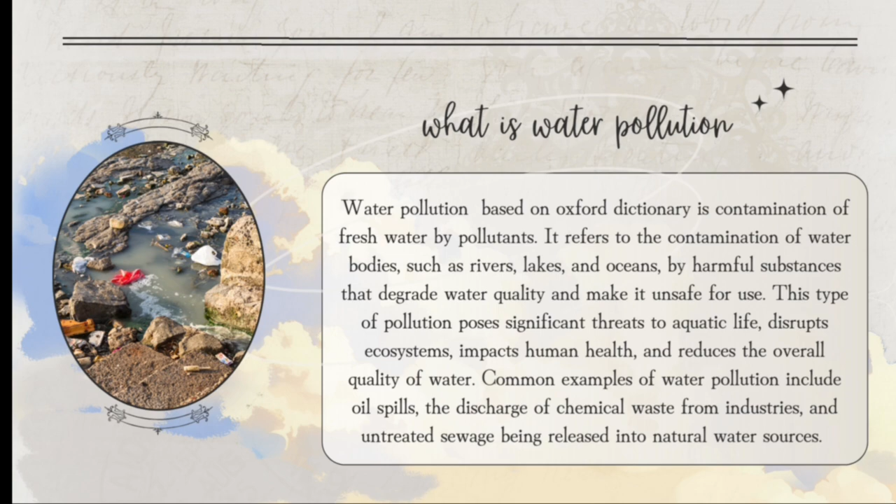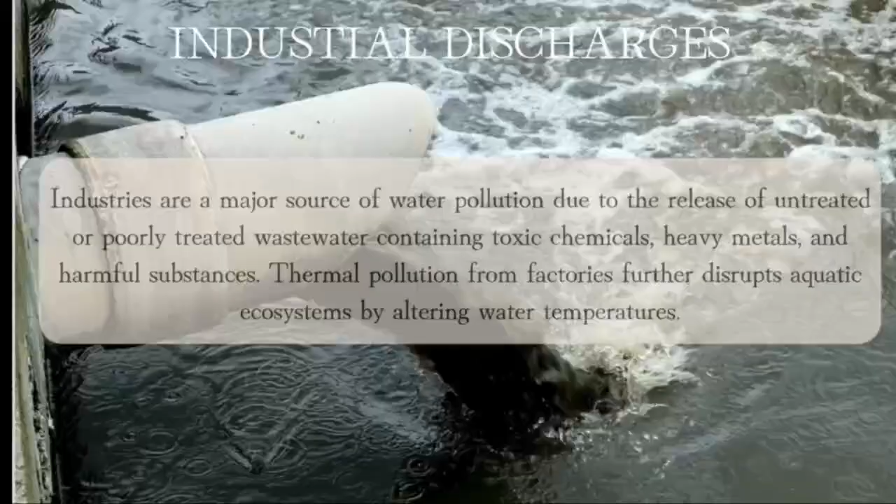Here are some of the factors that contribute to water pollution. Firstly, industrial discharges. Industries are a major source of water pollution due to the release of untreated or poorly treated wastewater containing toxic chemicals, heavy metals, and harmful substances. Thermal pollution from factories further disrupts aquatic ecosystems by altering water temperatures.

Secondly, agricultural runoff. Excessive use of fertilizers and pesticides in agriculture leads to runoff during rainfall, carrying these chemicals into water bodies. This runoff causes eutrophication, where algal blooms deplete oxygen levels, suffocating aquatic organisms.

And last but not least is urban runoff. Urban runoff, like oil spills, introduces harmful hydrocarbons and toxic compounds into the water, poisoning fish, marine mammals, and other aquatic organisms. And to make it worse, the long-lasting nature of its harmful effects persist for years.

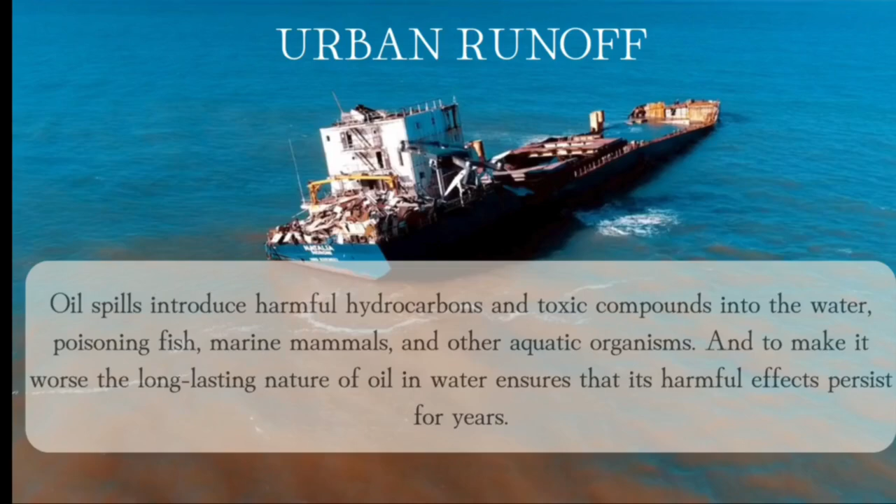Now let's move on to the experiment. The experiment that we're conducting is about evaluating the severity of oil spill. The objective is to assess the impact of an oil spill on water quality and aquatic ecosystems.

These are our expected outcomes. During the pre-spill stage, baseline water quality will show normal DO, pH, and low turbidity. In the post-spill stage, DO levels decrease as oil limits oxygen exchange with the atmosphere, turbidity increases, and pH may remain stable depending on the oil type.

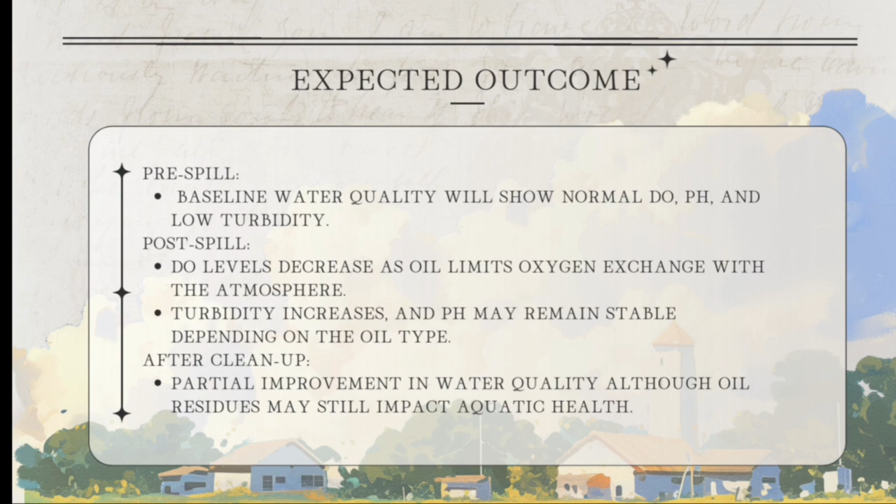Lastly, after cleanup, we'll see partial improvement in water quality, but oil residue might still impact aquatic health. By doing this experiment, we conclude that this demonstrates how oil spills harm marine life by disrupting their habitat, affecting their health, and leading to long-term ecological damage.

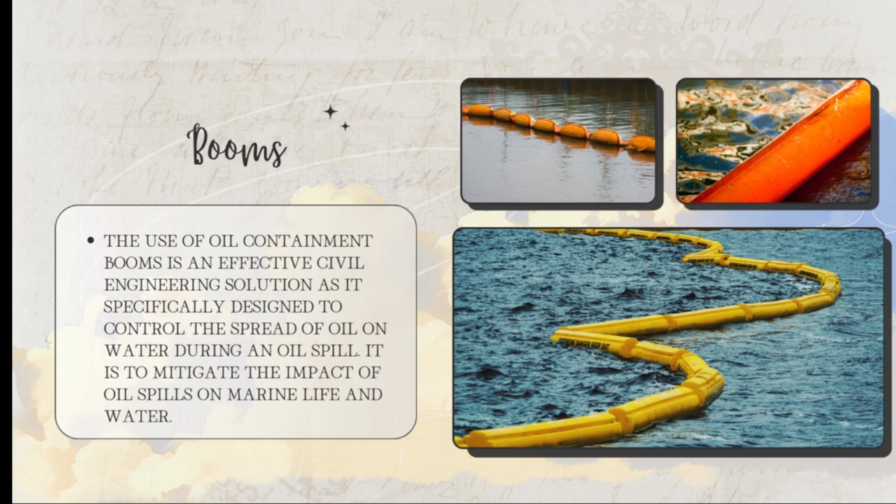Now, here comes a civil engineering solution for these problems. We came up with BOOMS. BOOMS is an effective civil engineering solution, as it's specifically designed to control the spread of oil on water during an oil spill. It aims to mitigate the impact of oil spill on marine life and water.

Let me explain to you how BOOMS work. To get started, BOOMS are deployed around the spill area. They can be anchored in place or left free-floating, depending on the spill situation and water conditions.

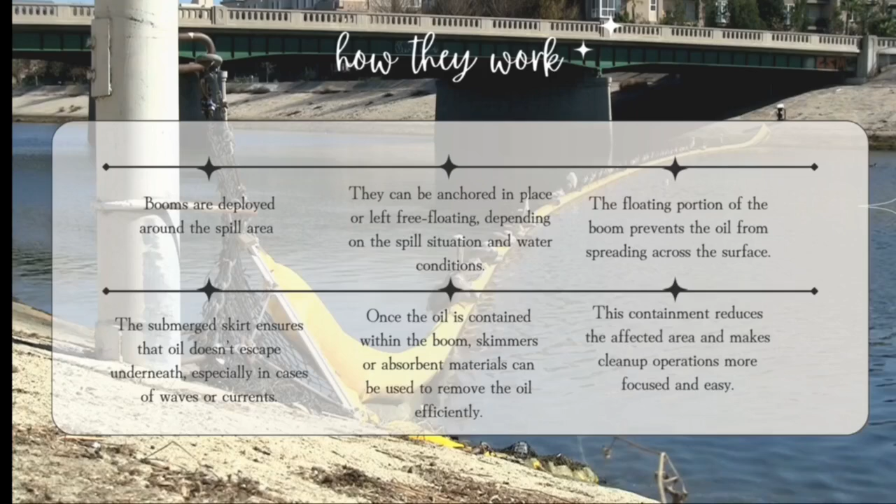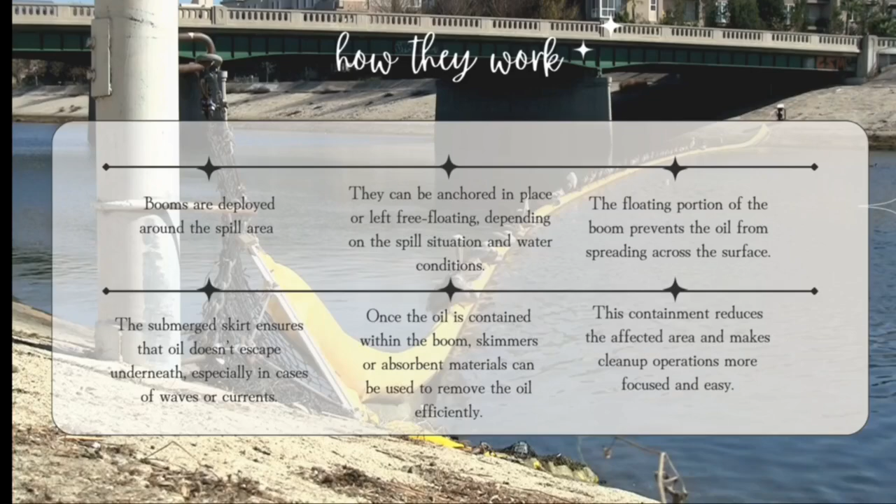The floating portion of the boom prevents the oil from spreading across the surface. The submerged skirt ensures that oil doesn't escape underneath, especially in cases of waves or currents. Once the oil is contained within the boom, skimmers or absorbent materials can be used to remove the oil efficiently. This containment reduces the affected area and makes cleanup operations more focused and easy.